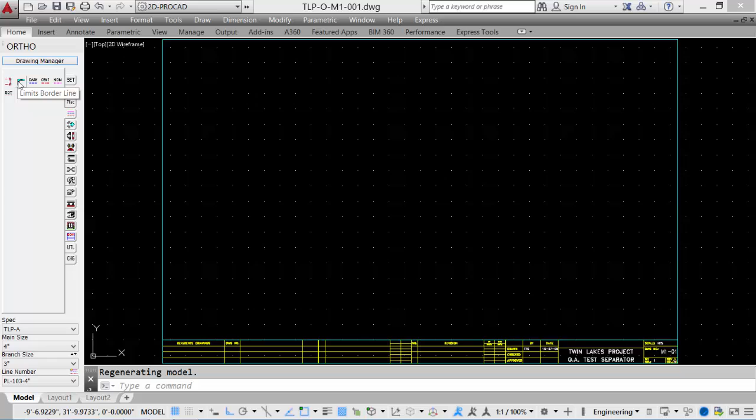Before we place our equipment, we'll add a matchline border. So we'll take a look at our line type tab and select the limits border line. We'll pick a random starting point and we'll give it a distance of 32 feet by, say, 20 feet by 32 feet, and then back down 20 feet. This represents the area limits or the matchline area, and then we'll place our equipment inside.

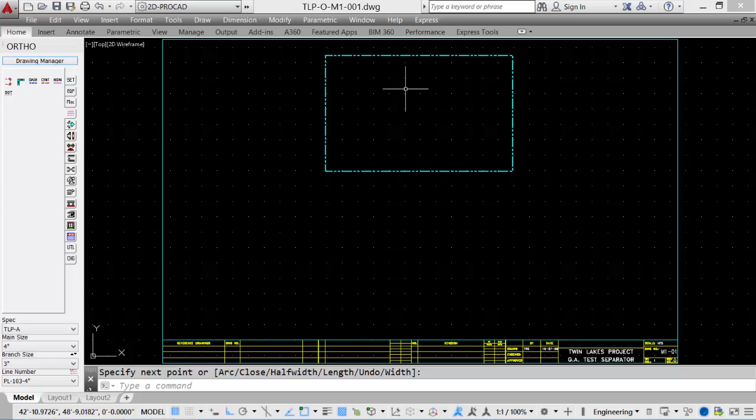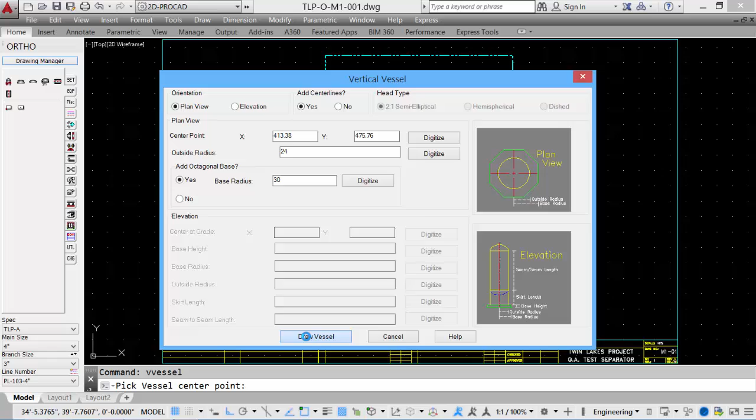So we'll have a vertical vessel that I'll place down in this corner and a horizontal vessel that we'll place over in this area. Back to our equipment, we'll select the vertical vessel. For the center point, we can just click a point over here somewhere. We'll set the radius to 24 inches. Add the base radius. We say 30. Once the values are set, we can say draw vessel. And the vessel is drawn. So we have our 24-inch radius vessel and then our 30-inch radius base.

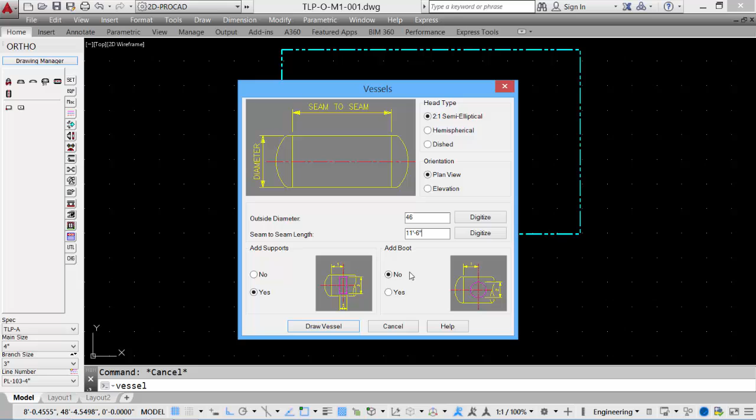Let's now place the horizontal vessel. Select the horizontal vessel. We're in the plan view. We'll use the default 2:1 semi-elliptical. Diameter on our vessel, we'll use 46 inches. Seam to seam length, we'll say it's 11'6". Do we want to add the supports? We'll say yes. We won't worry about a boot on this one. Select the draw vessel. And now it asks for our vessel supports.

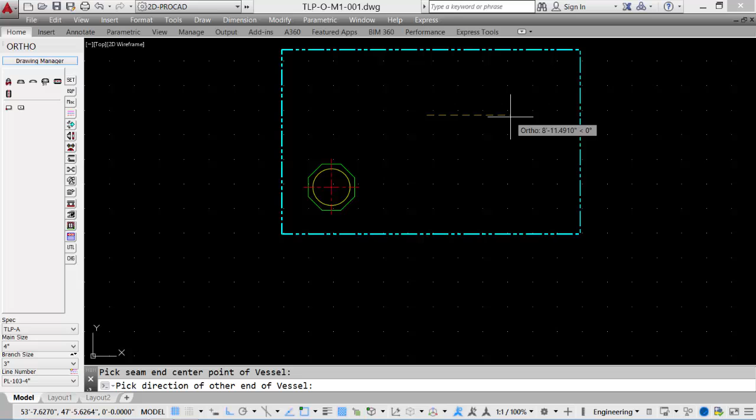So our seam to center distance, so this distance right here, say 24 inches, say 2 feet. The thickness, we'll say is 8 inches. And the support width, we'll say is 2'6" or 30 inches. Say OK. Pick the start point of the vessel, so we'll just come over here somewhere and pick a point. The direction of the vessel, and our vessel is placed.

Now we'll look at placing the equipment in our elevation. So the first thing we can do is draw just a normal line, AutoCAD line. We'll consider that to be our grade line. We know that it's an orthogonal drawing, so we need to extend lines, and these are just AutoCAD lines coming straight down to represent the starting points of the equipment.

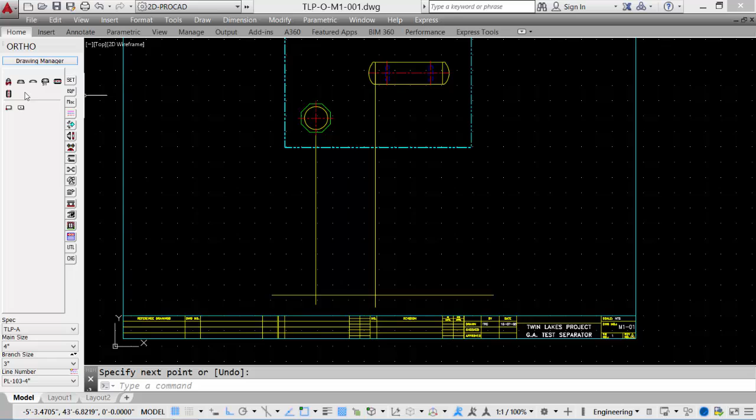We can select our vertical vessel. This time we'll do an elevation view, so we'll select the elevation. Now we can go in center at grade, so we can digitize this and pick up this intersection using our object snaps. And then we can add the information. So this would be known information from our data sheets.

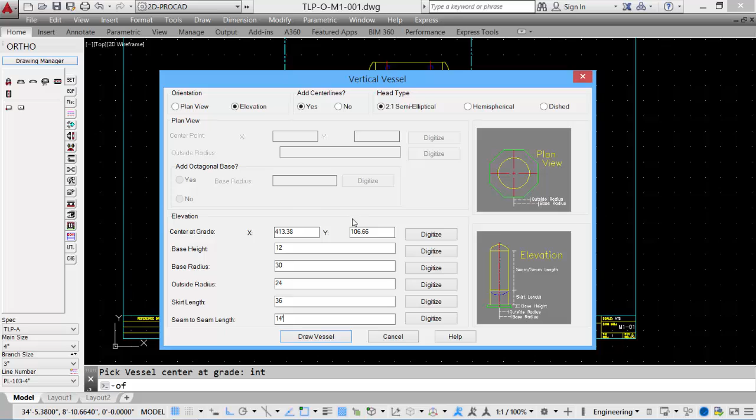So the base height, say, is 12 inches. Base radius is 30. Outside radius, 24. The skirt length, 36. And the seam to seam length for this vertical vessel, we'll say is 14 feet. Enter the values, and then click Draw Vessel. And the vessel is drawn in the elevation.

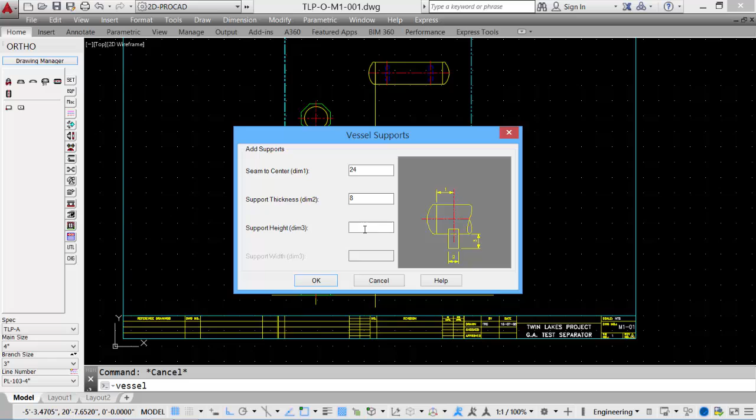To draw the horizontal vessel, pick the horizontal vessel, elevation view this time, outside diameter, seam to seam length, and we click on Draw Vessel. The seam to center, 24 inches. Support thickness, we said was 8 on the first one, and then the support height, we'll use 30 inches or 2'6". And somewhere along this, we can place our vessel. So I'll just pick the midpoint here, and we can move this after. The vessel is drawn. It's a little high, but we can always use our move command to move it down.

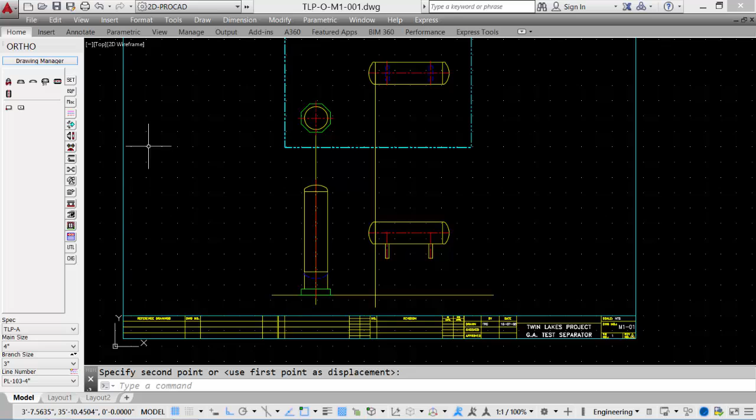We can also include concrete piers or steel framing for the vessel to sit on, and we can just use the AutoCAD rectangle command. And we can move it from midpoint to midpoint and then copy it over, just using AutoCAD's modify tools. We can even use things like the Match Properties tool to select a concrete foundation and change these to concrete. And then erase our construction lines.

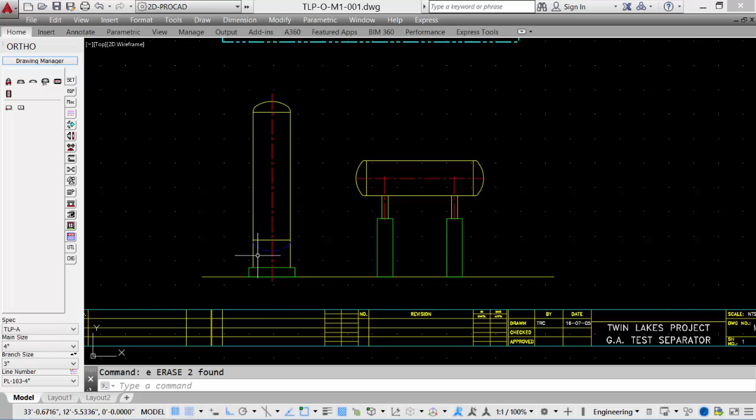And there's our plan view, vertical vessel, horizontal vessel with saddles. And then our elevation, south elevation with our vertical vessel and then the horizontal vessel. Next, we'll add the nozzles.

The last topic in Module 2 is adding nozzles. So once we've placed our equipment in both our plan and elevation views, we can then place some nozzles on our equipment. We'll zoom up on our plan view and place the nozzles on this view first. First, we'll set our spec and our main size and our line number if required. We can then select our flanges tab and then select the nozzle tool.

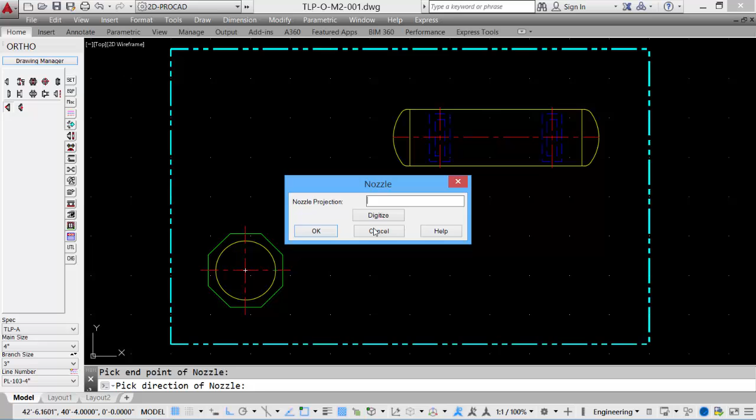Take the default weld point and we'll place it on the quadrant of our vessel, and then for the direction just pick to the right, then ask for a nozzle projection. We'll use 8 inches and then click OK. The nozzle is placed. We can do some AutoCAD trim tools to clear out the base underneath the nozzle.

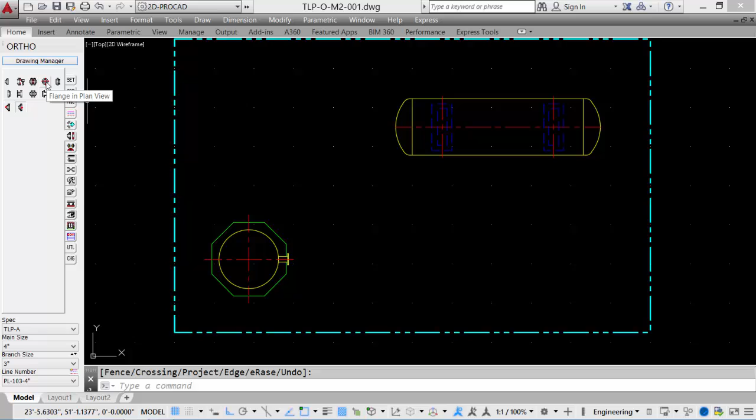On our horizontal vessel, we want to place a flange or a nozzle coming off the top of the vessel, which in this case would be a flange in the plan view. We can pick the flange in plan view tool, select our pipe size, we'll leave it at 4 inch, say OK. Pick the center of the flange. We'll just do a little reference distance here over about 8 inches. And then we'll add a full circle. And a full circle is placed.

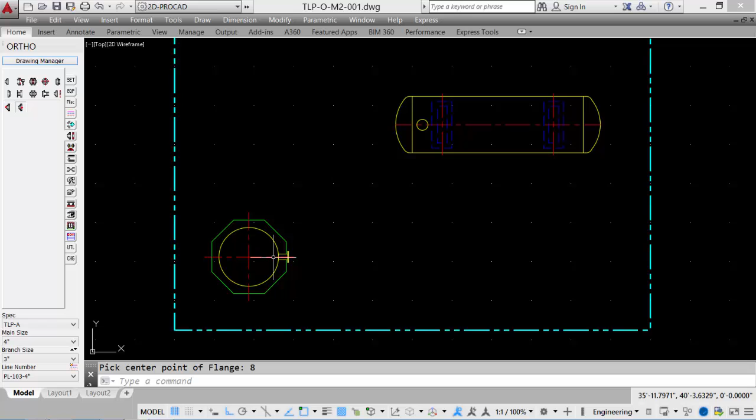So there's the 2 nozzles, one off of our vertical vessel and the one coming straight up from our horizontal vessel. So let's add those same nozzles on our elevation. Select the nozzle tool, do the vertical vessel first, set it back to the weld point, and say OK. Pick the end of this vessel. We'll just put it in here because we can move it later on. Again, the same 8-inch projection, and the nozzle is placed. And then we'll just move that nozzle up, and let's say it's 12 feet up.

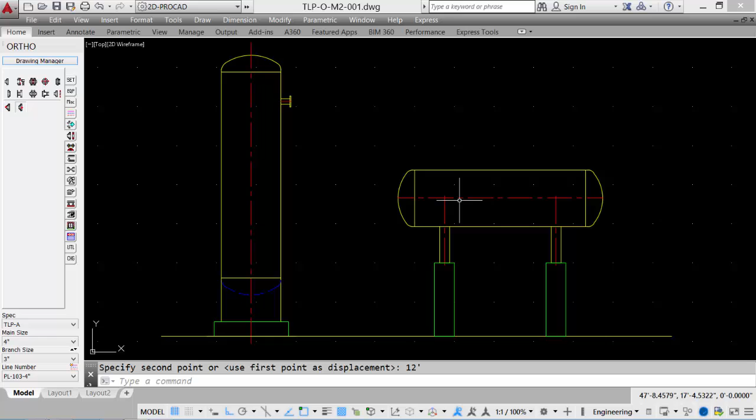And there's our location. On our horizontal vessel, we can place another nozzle. Again, the weld point. We want to come over again 8 inches. This time we'll go straight up, and we'll use that same projection of 8 inches. And there's the nozzles placed on our vertical vessel and our horizontal vessel. We're now ready to do the piping for the drawing.

This concludes the topics covered in Module 2. Please review Module 2 or select the next module.